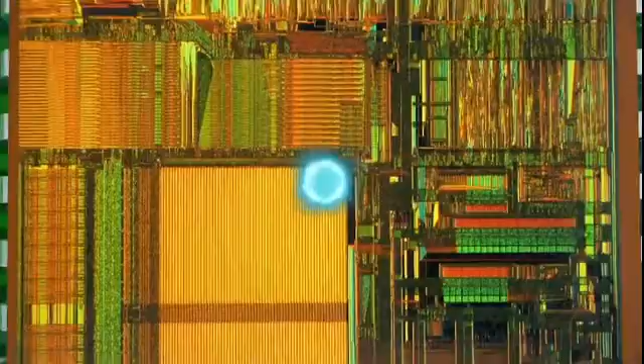The pace of digitalization is unprecedented, and it's completely transforming our world, harnessing new technologies across the landscape of industry to fundamentally change the way we live.

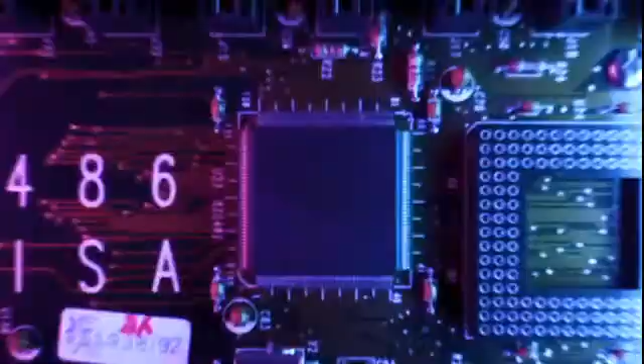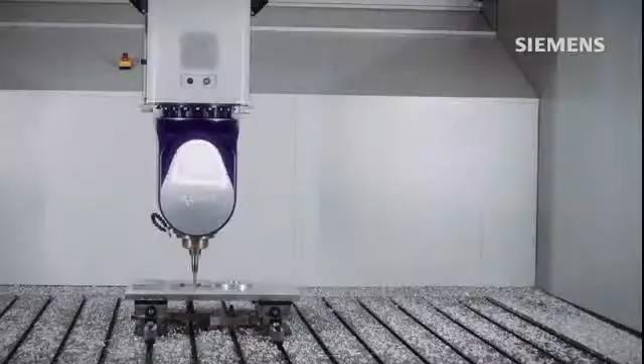Electronics will be pervasive as companies move from selling hardware to providing personalized digital services. IoT will connect everything with automation and intelligence to optimize performance. It's all enabled by digital threads that turn silo data into connected disciplines and processes. These threads form the neural network of a digital twin, a virtual entity which mirrors the physical world, turning data into insight to continuously design, build, and optimize throughout.

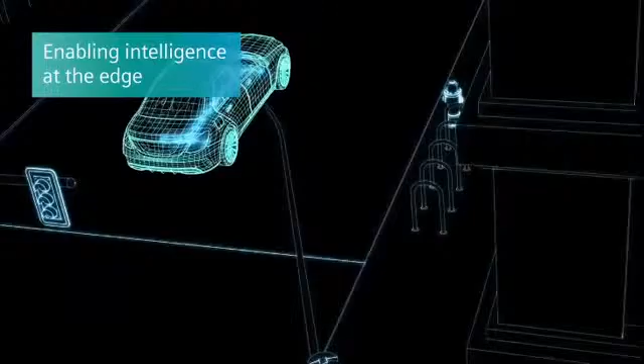The pace of digitalization is unprecedented, and it's completely transforming our world, harnessing new technologies across the landscape of industry to fundamentally change the way we live.

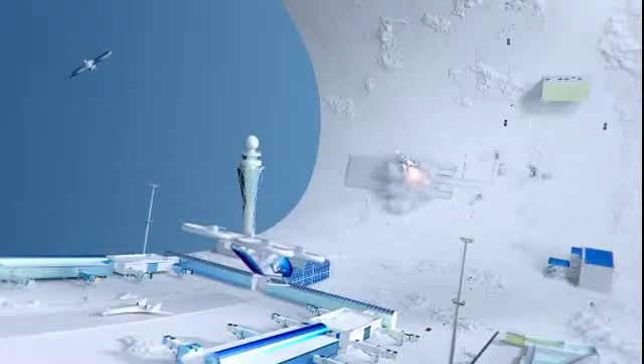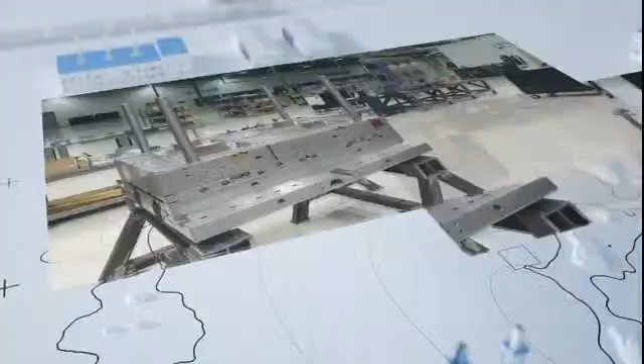Electronics will be pervasive as companies move from selling hardware to providing personalized digital services. IoT will connect everything with automation and intelligence to optimize performance. It's all enabled by digital threads that turn silo data into connected disciplines and processes. These threads form the neural network of a digital twin, a virtual entity which mirrors the physical world, turning data into insight to continuously design, build, and optimize throughout the product and production lifecycle.

This transforms siloed electronic systems development, enabling intelligent simulations and parallel design to front-load quality control. Synchronizing data throughout the supply chain and manufacturing process improves productivity and allows manufacturers to diagnose potential obstacles and avoid them. An integrated lifecycle with requirements, planning, and execution in a single system allows complex products to be developed faster and with full collaboration of all stakeholders.

Siemens can help you achieve rapid digital transformation, powered by the world's most comprehensive digital twin. There's no need to dream about the future. It's already here.

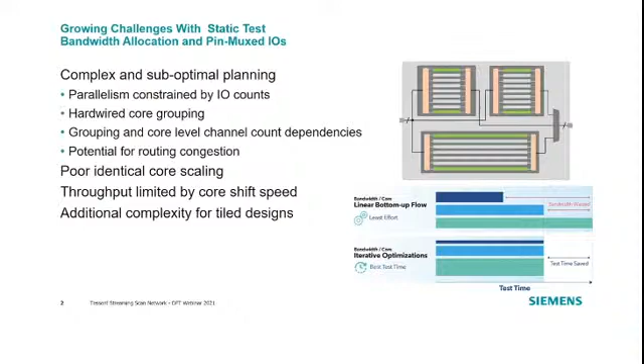Part of the SSN network is what we call a host node in each core. This host node ensures that the right data is picked up from the SSN bus and sent to the scan inputs of the core—could be compressed, uncompressed, or a combination of both. It also ensures that the scan output data is placed back onto the bus. The host nodes also generate the DFT signals locally: scan enable, scan clock, and so forth.

Each node knows what to do and when to do it based on a simple configuration step that's done over IJTAG. This means that the groupings of which cores are tested together and which cores are tested sequentially, which cores are active—these decisions are not hardwired. They are fully configurable.

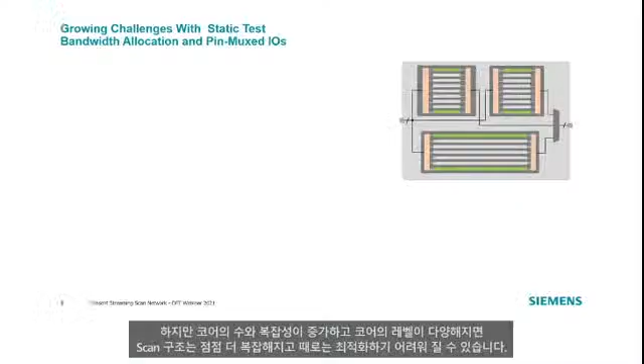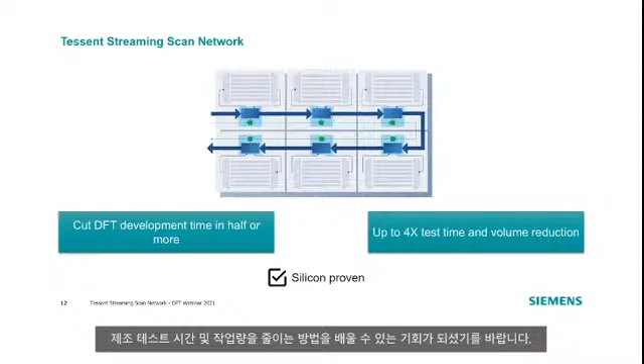Here at the DFT India Tech Day, I hope you've had a chance to learn about the silicon-proven Tessent Streaming Scan Network and how you can leverage this technology to reduce your DFT development time and reduce manufacturing test time and volume.